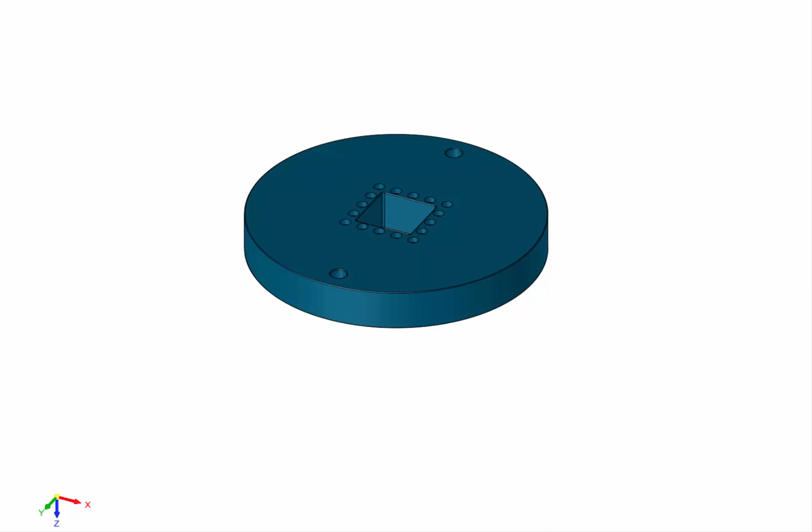It is now possible to duplicate components and even sub-assemblies in a rectangular or radial array in one simple operation. It is also possible to exclude or modify locations and orientations.

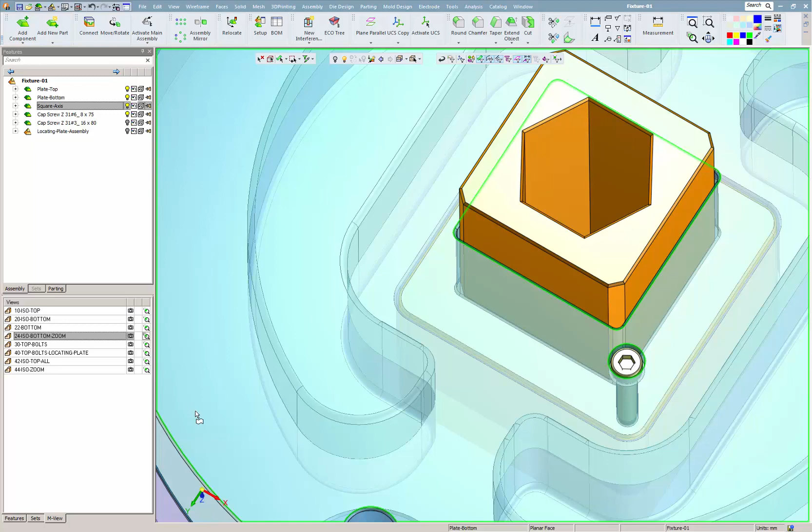First, we connect the orange axis holder to the plate using M8 bolts. The first connecting bolt is already added. We duplicate it around in a square-shaped array and select the item we want to duplicate, duplicating it the way we choose, in this case, inserting 5 duplications.

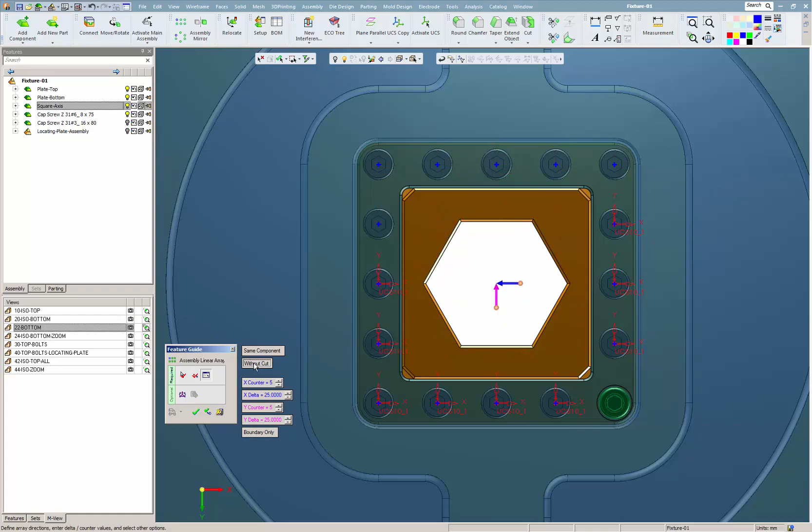Naturally, we do not need to use all those middle bolts. Instead of full array, we can choose outer boundary. We see all the locations which were set quickly, accurately, and very easily.

The first connecting screw is already added. We will now copy bolts around the perimeter using Assembly Array. We find the rotation axis, choosing by angle or number of bolts.

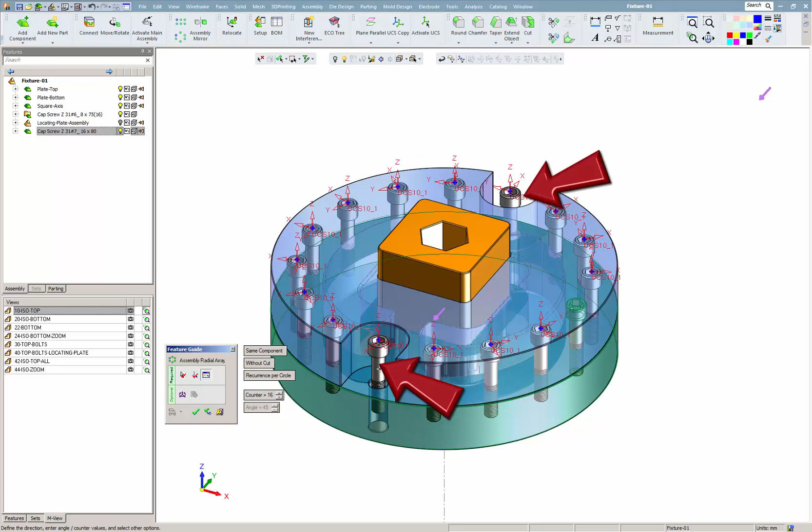The problem we have is that these 2 bolts are positioned in areas that we do not want them to be in, so we have the option to remove the problematic bolts, or as we do in this case, change their location, all as part of the Copy Array function.

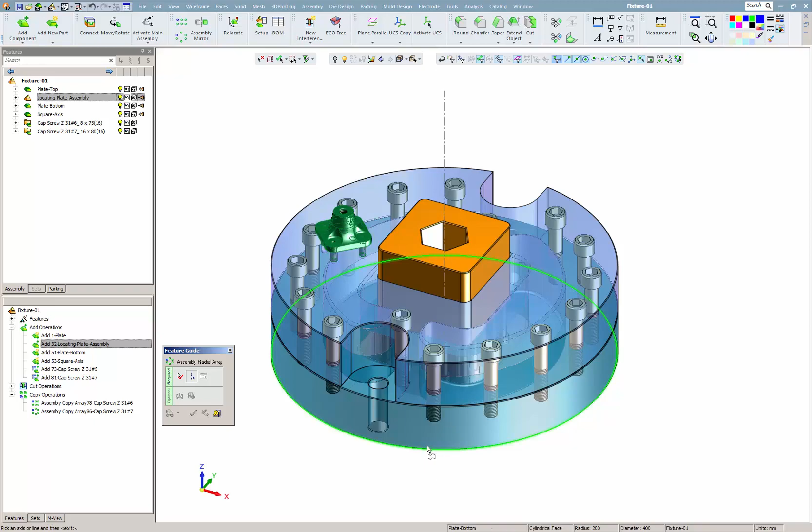Here we can see how Copy Array can be applied not only to catalog items but also on complete sub-assemblies. We will now duplicate the locating plate 3 times around the big plate using Assembly, Radial, Select Component, Define Rotation Axis, and presto! It is duplicated 3 times.

We can see that there is some interference with the connecting screws, so we will edit the operation and take out some of the screws from the array. As you can see, everything is now perfect.

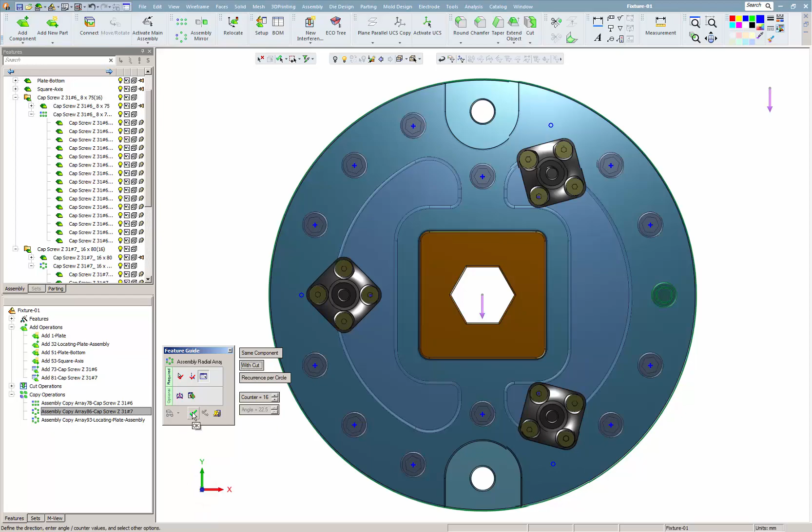The new Copy Array makes the design process much quicker. It enables a definition of many items. It is very flexible and allows full control over the appearance, location, and orientation of the component in each location.

Here's a quick peek at how Copy Array can be used for automation. This is a top view of the plate. We use the Setup tool to control the diameter of the locating plate, and automatically the system changes the shape and number of screws. When we decrease the diameter to 60, the number of bolts changes automatically to 3.

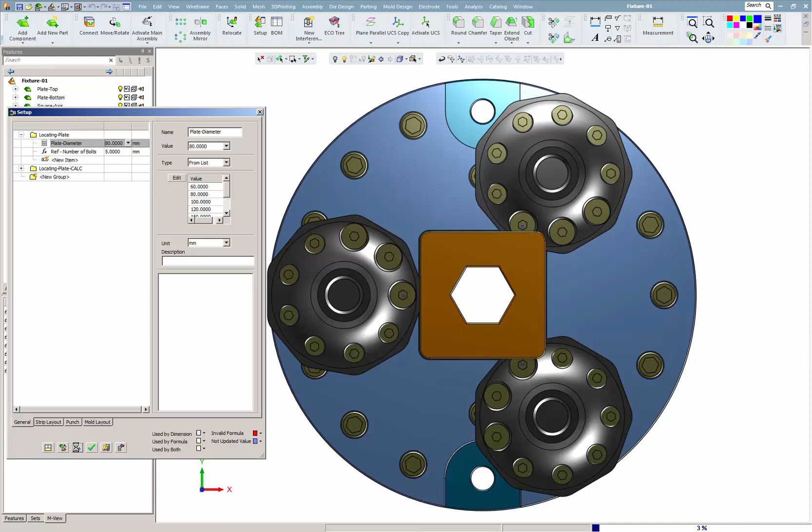If we change the diameter to 150, it will have 9 bolts, but in any case, 150 is too big. If we change the diameter to 80, we will get something more reasonable. As you can see, Copy Array can be used to change the shape or configuration of a sub-assembly, here defining 5 bolts instead of the original 4.